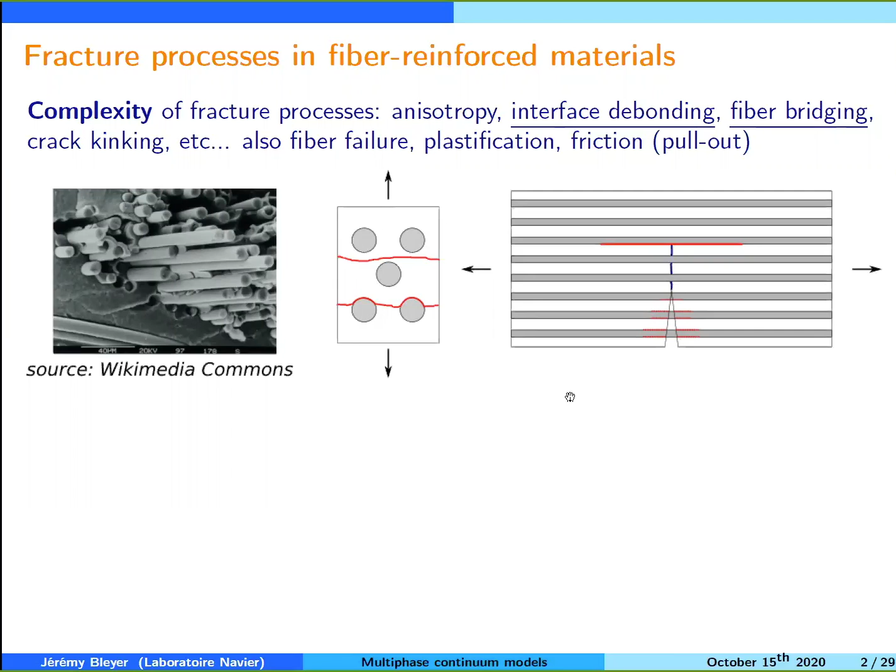This is the two phenomena I will be interested in this talk: interface debonding and the bridging effect of fibers in such a situation. More complex aspects like fiber failure and plastification or friction during pullout of the fiber, I will not investigate here.

It's quite interesting for us at Laboratoire Navier, because even if we are a civil engineering lab, we have some applications with ultra high performance fiber reinforced concrete, as you can see on the left, and also some reinforcement systems, for instance, in old masonry structures, mostly in Italy.

These are systems comprised of a grid of steel and some mortar on top, applied to the masonry structure which may have been damaged. When you study the strength properties of such a reinforcement system, you can see multi-cracking in the matrix phase because the fibers still remain intact inside, and this is the kind of thing we would want to address here.

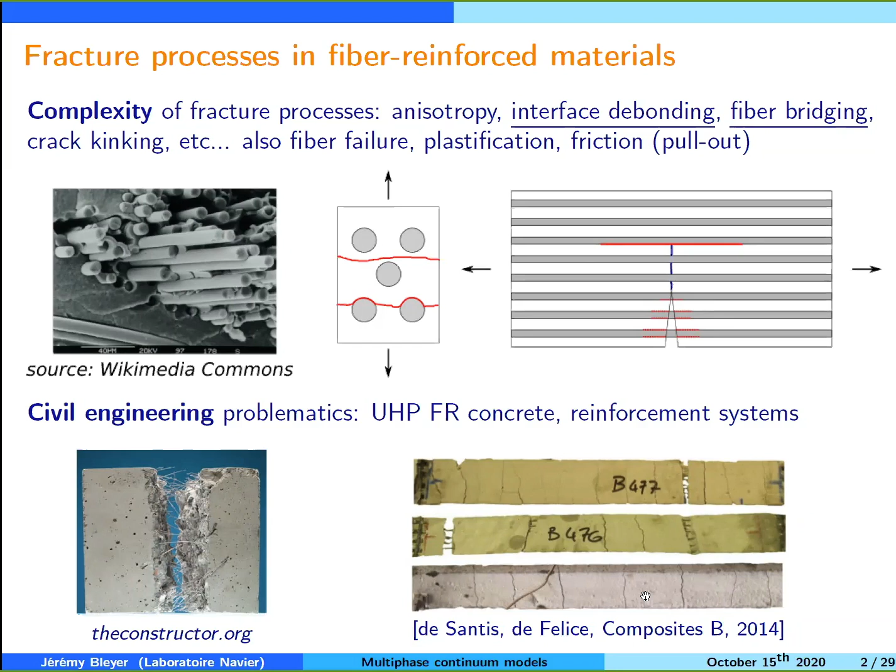As I mentioned, I'm interested in the crack bridging mechanism. You have intact fibers that still apply some forces on the crack, which is present only in the matrix phase, in competition with the fact that the crack will continue propagating in the matrix, and the fact that you can also debond the interface between the fiber and the matrix.

The competition between these two mechanisms is quite important, because it gives a toughening mechanism, which is quite interesting in biocomposites, for instance. As you will see, this will give some pseudo-ductile behavior due to the presence of multi-cracking and debonding.

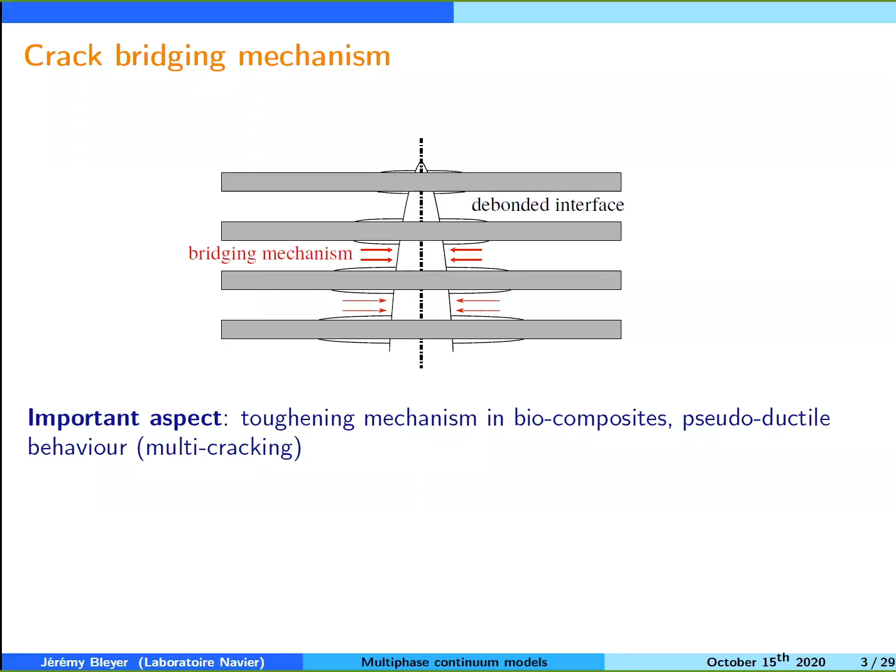So the question here is, how can we model this feature at the macroscopic scale? Because obviously we do not want to model explicitly all the fibers and the interfaces. One possibility is to use cohesive zone models, where you have some ad hoc traction separation law when modeling the crack, but this requires some fitting or specific identification.

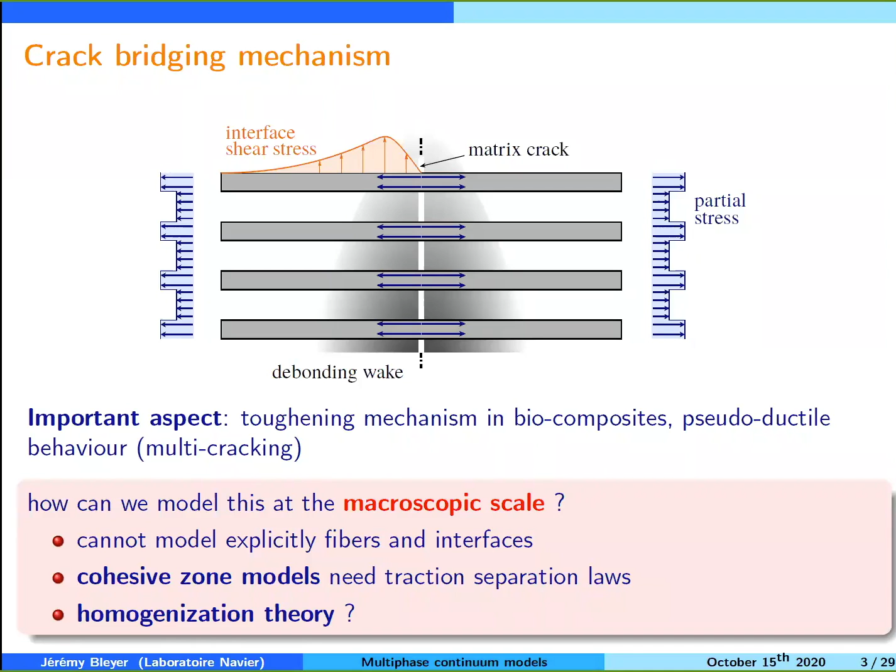The question here in this talk is, can we reproduce this kind of crack bridging mechanism using only a continuum theory that we could derive from homogenization, for instance?

The main issue here is that standard or classical homogenization has some issues, especially when you have a poor scale separation between the macroscopic scale of the structure and the scale of the heterogeneities, because you need a proper scale separation to apply standard techniques. It also doesn't treat well boundary layer effects, especially near free edges or around cracks, which is exactly what will happen here.

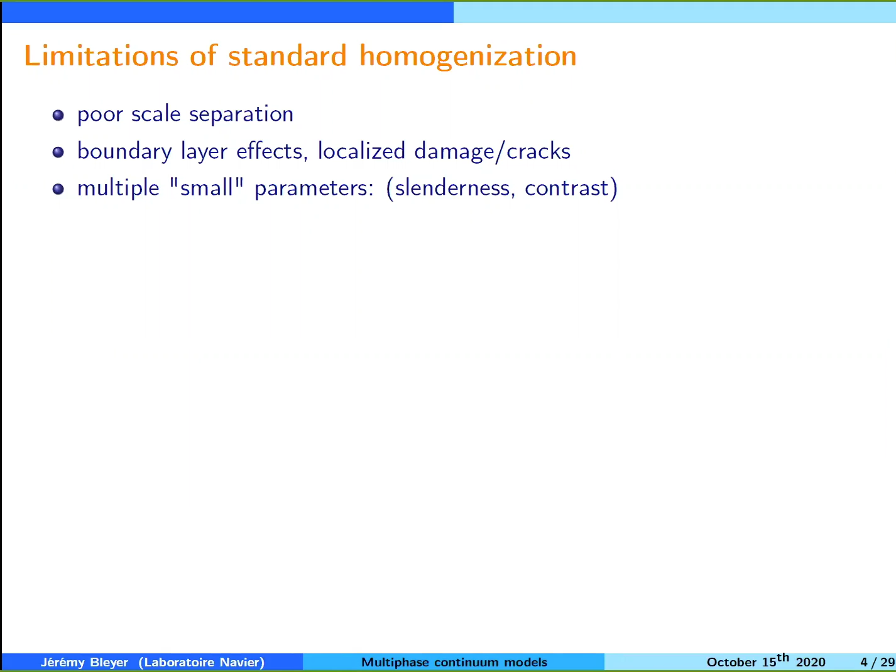And in some instances, it's also difficult to derive a proper homogenized behavior when you have multiple small parameters, like the scale separation parameter, but also the slenderness of the heterogeneities or the contrast of properties between heterogeneities.

All three of these situations can be quite frequent in fiber reinforced media. The idea here is to use generalized continuum models that may provide some answers to these limitations.

The standard Cauchy continuum cannot model the bridging region in an appropriate manner because, as you may have seen, in the matrix phase you have a crack-free surface, you have opening displacement on the matrix phase, whereas the fibers remain fixed. If you look at the symmetry plane, their displacement is fixed. So you cannot model in a single continuum which mixes both phases the fact that you have a crack-free surface in the matrix and a fixed displacement in the fiber.

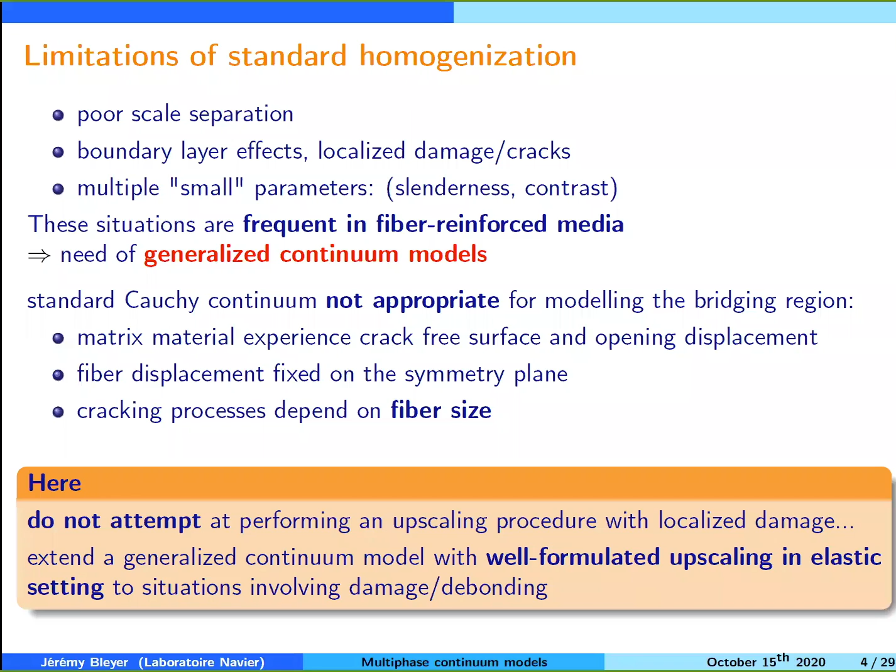Also, as everyone knows, the Cauchy continuum doesn't have any scale effect, so you cannot reproduce the fact that the cracking processes will strongly depend on the fiber size and give a size effect in such materials. So here we'll propose a generalized framework to account for all these aspects and investigate how we can model fracturing and debonding in such materials.

So here I will present the multiphase continuum model. The idea is that you replace the heterogeneous material by two homogeneous phases - let's say a matrix phase and a reinforcement phase. And both of these phases will have different kinematics, namely two different displacement vectors, which I call UM and UR.

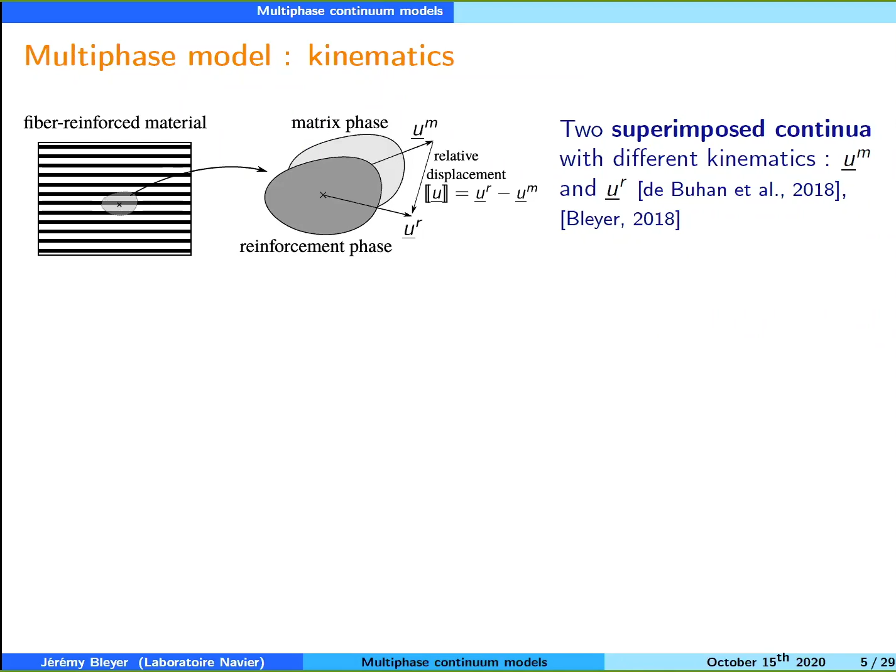And of importance is the relative displacement between the two phases. You have many ways to formulate such a theory. You can build them from the virtual work principle by just assuming that you will have a first gradient theory, that the work of deformation will involve the strain of both displacements and also the relative displacement between the two phases.

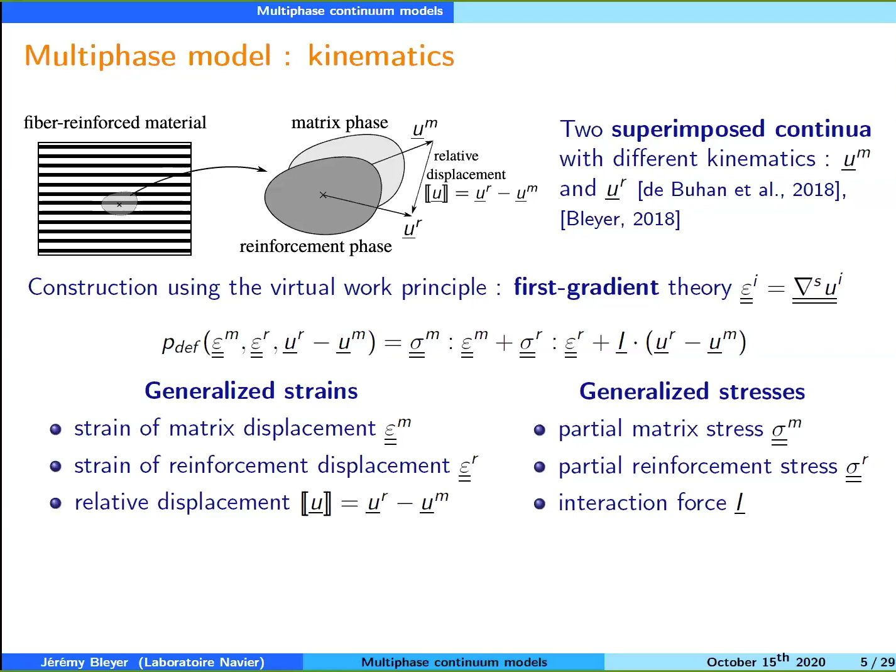When you assume this kind of expression for the deformation work density, you can identify, with respect to each strain measure, some generalized stress measures that will be associated. In terms of strains, we have the strain of the matrix displacement and the reinforcement displacement, and the relative displacement between the two phases. Associated with that, we will have a partial matrix stress, a partial reinforcement stress, and some additional stress, which we'll call an interaction force, which is a vector and which is related to the relative displacement.

And when we impose the fact that both phases have the same displacement, the same kinematics, then we recover the standard Cauchy medium, because we have only one strain measure, the relative displacement being 0. And in this case, we have the Cauchy stress, which will be the sum of the two partial stresses.

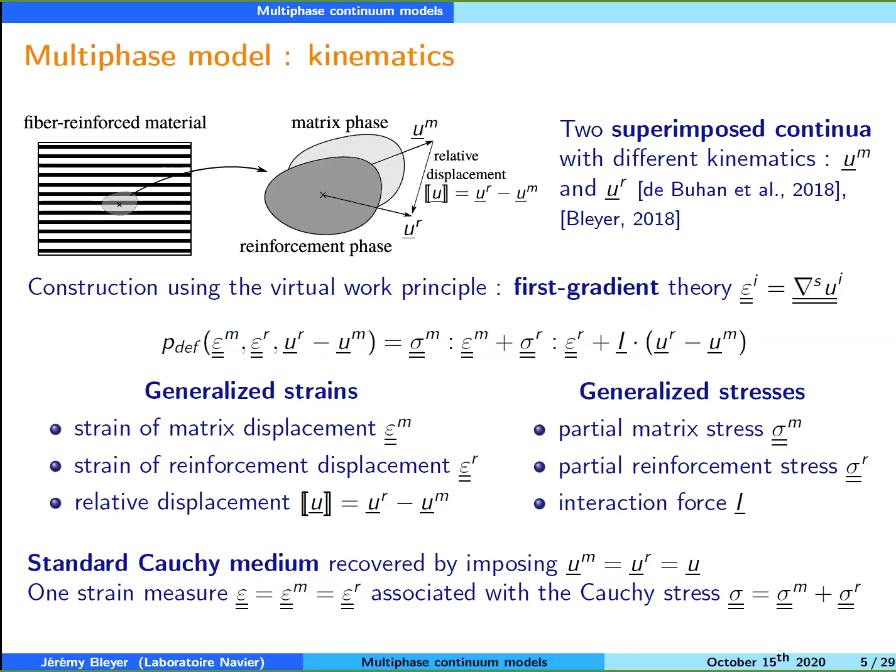So for people who know porous mechanics, this is exactly the same framework of having a matrix skeleton and a porous phase, except that in porous medium we have a solid and a fluid, but here basically we have two solids which share the same material point at the macroscopic level.

So if we use the virtual work principle, we can derive the balance equations at the macroscopic scale. You'll see that the divergence of the partial stresses are related to this interaction force and to some body force that can act on both phases. Again, if you sum these two equations, you recover the standard Cauchy continuum balance equation.

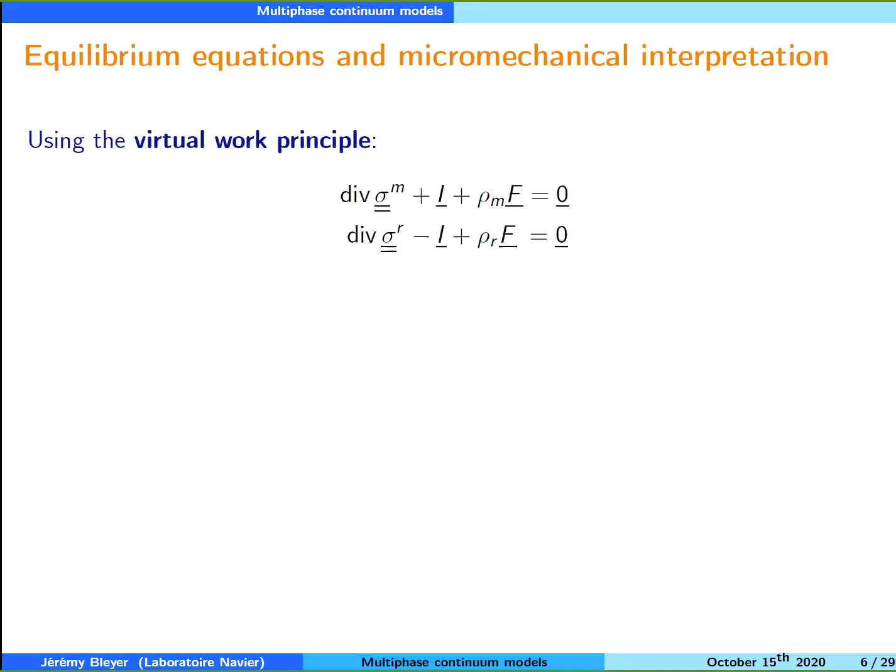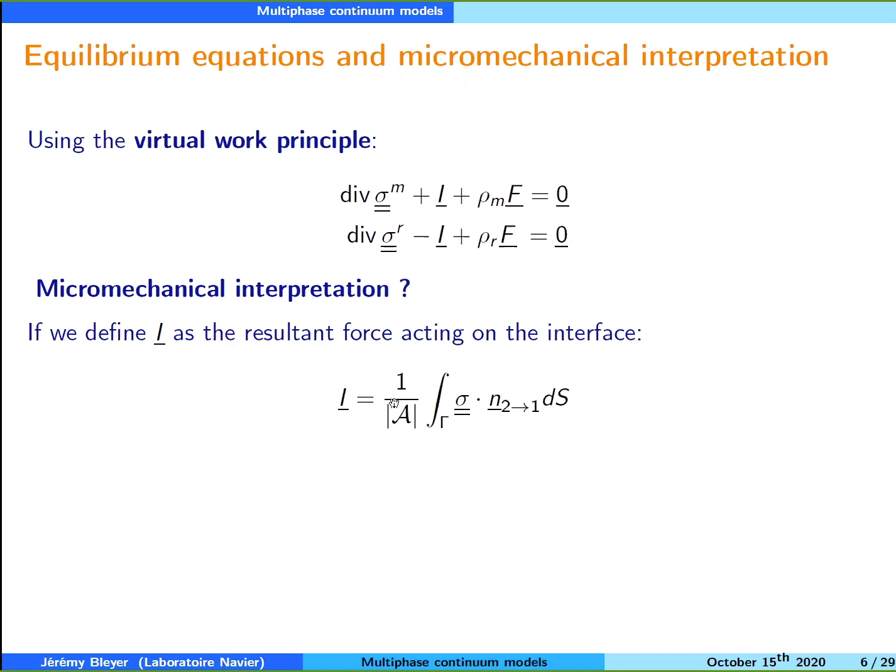So the main question here is, what is the micromechanical interpretation of these quantities? If we assume that we have a unit cell A of heterogeneous material and an interface gamma between the two phases, matrix and reinforcement, and if we define the resultant force I, the average resultant force over the interface as being the interaction force I, then we can show from the partial stress balance at the microscopic scale, we can derive the partial stress balance at the macroscopic scale.

Exactly like this, so following Coussy, for instance, where the partial stress - you can see it's exactly the same form as above - the partial stress is defined as the average of the stress over each phase. Which I will denote like that. So you have the volume fraction and the average over the phases AI.

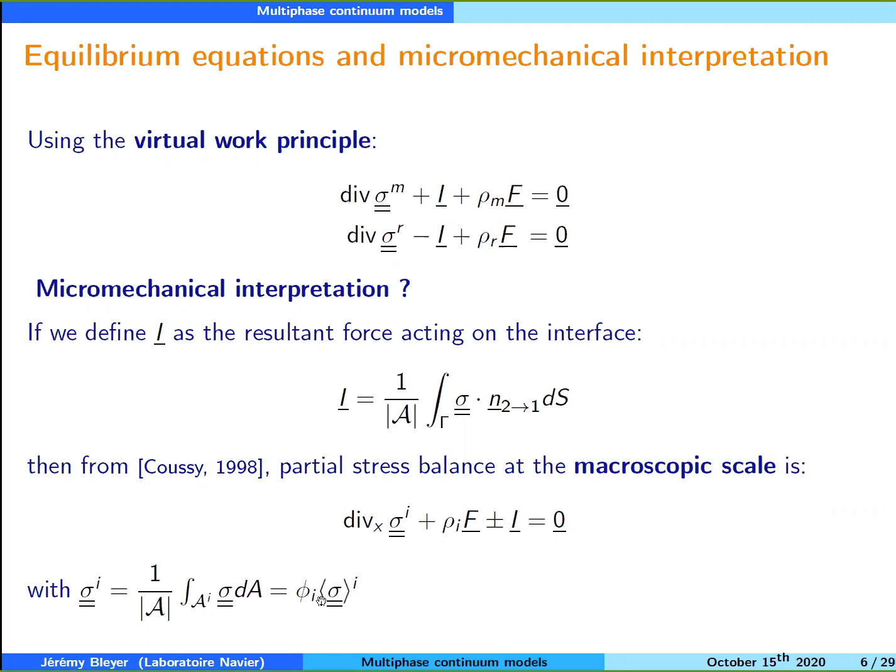So this gives us the main elements to derive an auxiliary problem, to go from the standard microscopic problem to derive the apparent properties of this generalized continuum model. Because the main issue when we work with generalized continua is how to compute the elastic modulus, and so on, generalized modulus that will appear when we assume an elastic behavior, for instance. So here I will do it in the elastic setting.

So here I consider a generalized auxiliary problem compared to what we usually do in standard homogenization. The main difference is that we are in a periodic setting where I apply some macroscopic strain on the boundary of the domain, and U will be a periodic fluctuation of the displacement field inside the domain.

The main difference is that I will additionally consider two eigenstrains in both phases, and two uniform body forces in both phases. So F here. That's quite different from standard homogenization. But in addition, I will assume that these eigenstrains and body forces are phase-wise uniform and are of zero average over the two phases.

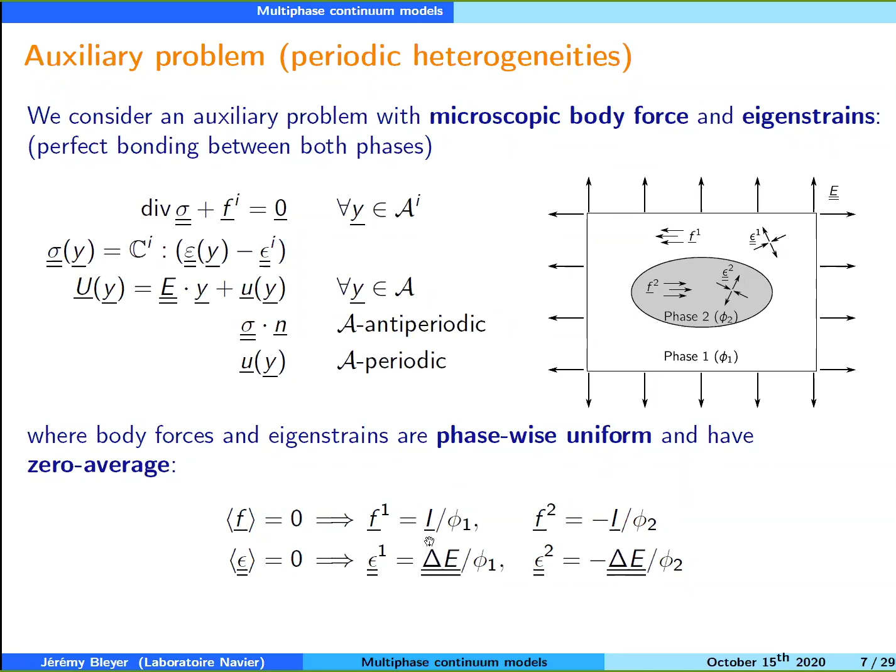So if F, for instance, is of zero average, then I can just replace it with a vector that I will call I, and divide by the two volume fractions of the phases, so that if I take the average of such F, it will be of zero average. And I can do the same for the eigenstrains by introducing some tensor that I call delta E.

If we do that, instead of piloting the problem with the macroscopic strain and this delta E, we can equivalently work with some EI, redefined with the relation between the EIs and the macroscopic E and delta E. When we do that, we have an auxiliary problem with three different and independent loading parameters: E1, E2, and I.

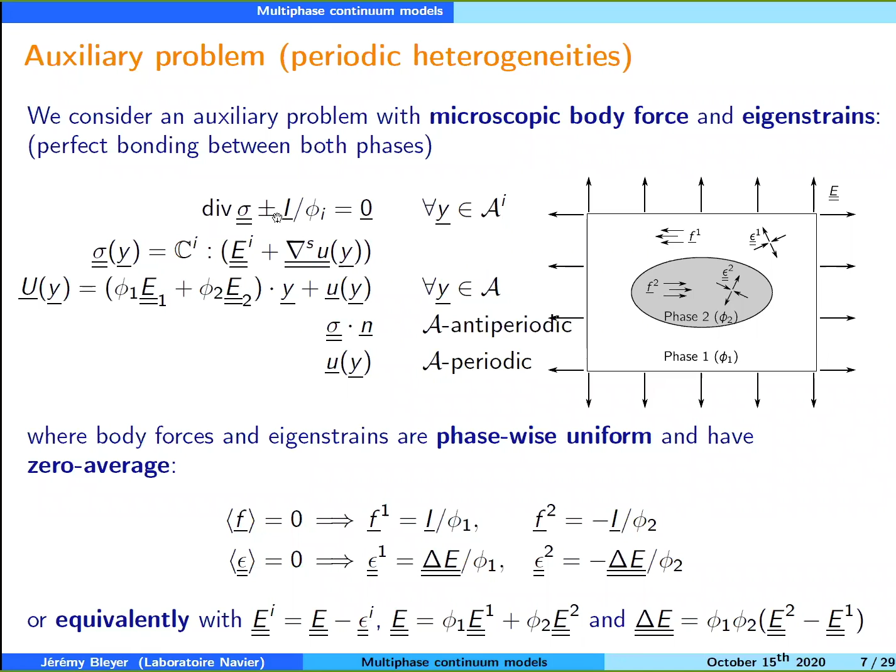And so I can solve this problem in an elastic setting. I can show, using an extended version of Hill-Mandel's lemma, that the dual quantities to these three loading parameters are exactly given by the microscopic interpretation I gave earlier of sigma I being the partial stress, the average stress on phase I, and the quantity associated with the interaction force.

It's something homogeneous to a displacement. I call it V, the relative average, the difference of the average displacement in both phases — U2 minus U1. So it's exactly what we would expect from the ideas that drive the construction of this model.

And when we have these three loading parameters in elasticity, we can write that the solution to the auxiliary problem depends linearly upon the three quantities. So we introduce some localization tensors, and we can compute the partial stresses and the macroscopic relative displacement V.

This will give us some apparent moduli, D11, D12, D22, etc. These, in bold here, are in fact third order tensors because they relate a second order tensor and a vector.

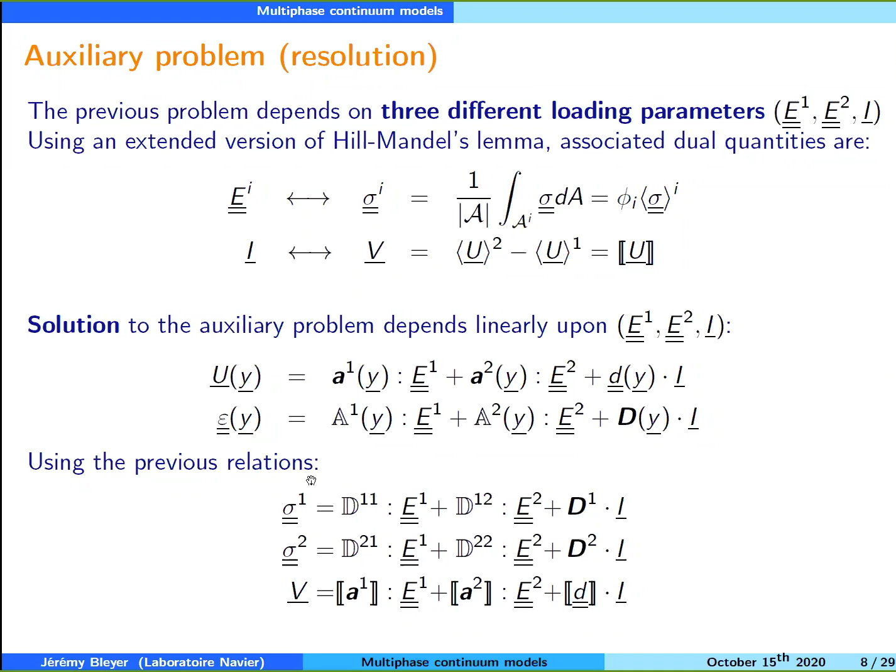Using the Maxwell-Betti reciprocity theorem, we can show that we have a symmetric behavior for this generalized behavior. And again, if we sum the two equations for the two partial stresses, assuming that we have the same strain in both phases and zero interaction force, then we can recover the standard Cauchy apparent modulus C-hom, which will be related to the moduli D11. So C-hom is D11 plus D12 plus D12 transpose plus D22.

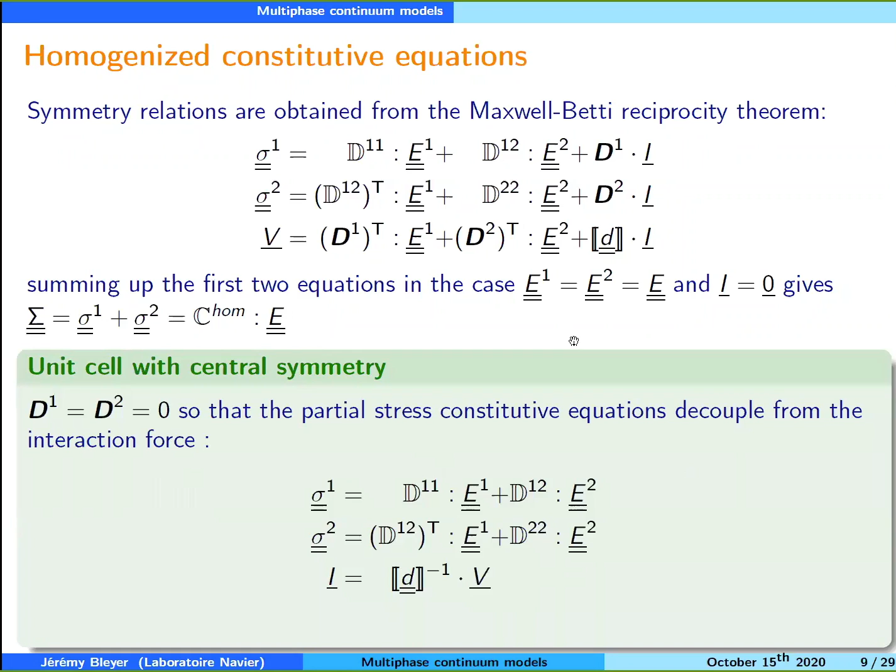And in the case where we have a central symmetry, the third order tensors vanish, so we have a much simpler relation in the end. In fact, we can go one step further when we have only two phases, two homogeneous phases — we can deduce the partial interaction tensors Dij from the standard macroscopic stiffness C-hom with these relations.

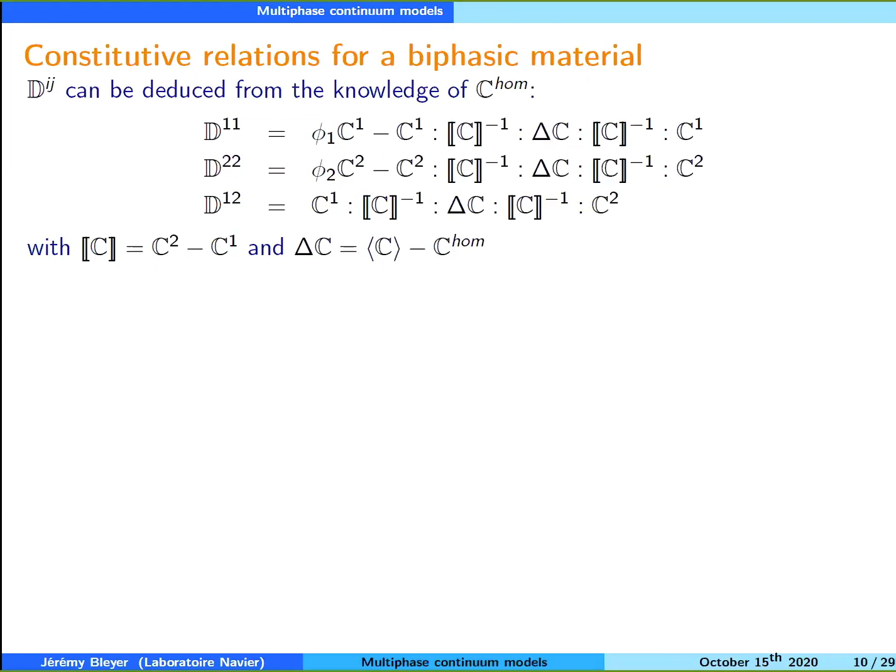And this gives us directly the value of these macroscopic tensors. Then we can investigate a quite important case in practice: when the inclusions are isotropic, very stiff compared to the matrix, and in small volume fraction, which is quite often the case.

With this kind of assumptions, and using results from Hashin and Rosen for cylindrical inclusions, we can show that the macroscopic stiffness — that's a standard homogenization result — is given by the stiffness of the matrix phase plus some uniaxial stiffness in direction one of the fibers, with a modulus E naught, which is the limit of the fraction of the fiber times the modulus of the material constituting the fibers.

So that's why we assume that this limit is not zero in small volume fraction, because otherwise we don't see the effect of the fibers.

And in this case, the above expressions simplify quite nicely because we don't have any coupling anymore between the two strains. The modulus of the matrix phase is, as expected, the stiffness of the matrix material, and the modulus of the reinforcement phase is only a uniaxial modulus in the direction of the fibers. So the fibers basically behave like an elastic bar aligned in direction one.

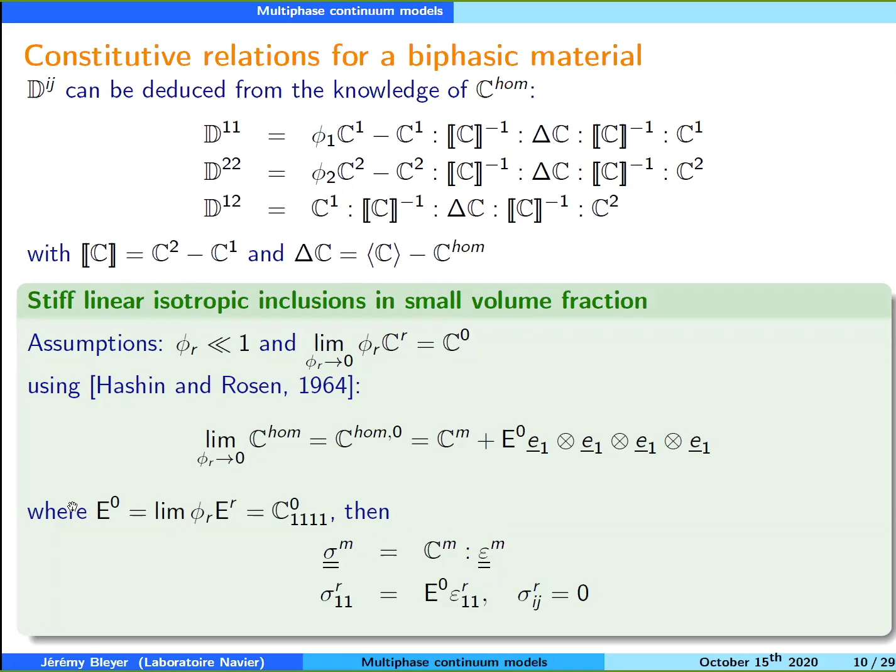So in this case, we can write the free energy density of this macroscopic continuum. We have three strains: a second order tensor, a scalar strain for the fibers, because we only have elongation in the direction of the fibers, and the relative displacement between the two phases. We have this decomposition of the free energy density with the contribution from the matrix, the contribution from the fibers, and an additional term related to the interaction between the two phases.

And this is what will be interesting here. This interface stiffness kappa is given by the solution of the auxiliary problem I presented before, when we have self-equilibrated body forces, so with no eigenstrains. This problem is quite similar to the homogenization of permeability in porous media. You can see quite easily that this modulus kappa will depend on the unit cell size S, so you will have a scale effect in this interface stiffness kappa.

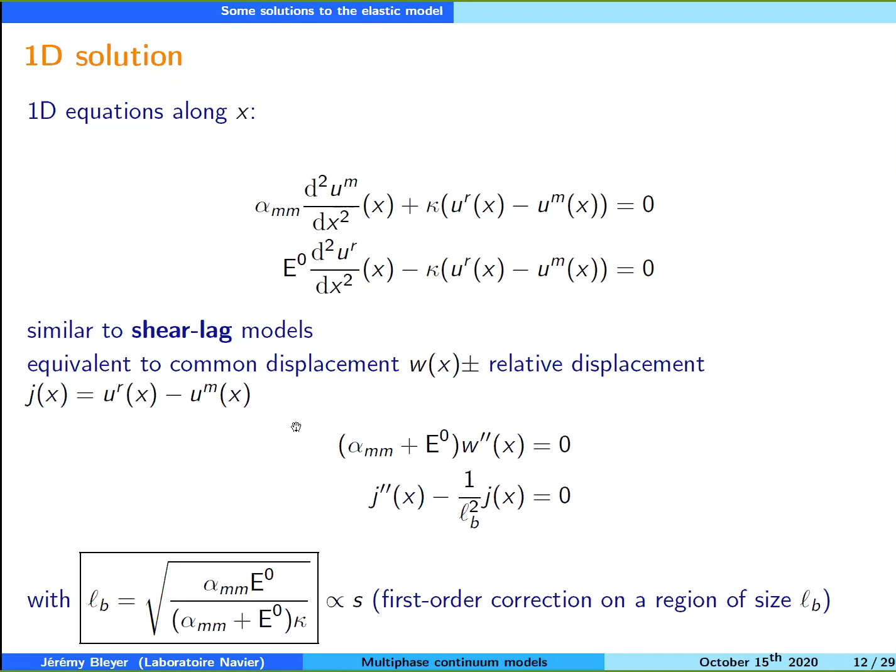So this multiphase model can be seen as a proper 3D generalization of shear lag models with strong micromechanical grounds, let's say. When you solve these equations, you can rearrange them by introducing a displacement W, which will be a common displacement of both phases, plus or minus a relative displacement of the two phases that I denote J here.

When you do that, you can recombine the equations and you have these two uncoupled equations. The first one is exactly the one you would get from the Cauchy continuum, so W would be the Cauchy displacement, and you can see the Cauchy stiffness that would arise in this setting.

And you have another equation, which is a Helmholtz type equation, because here it's only W with second derivative. Here you have J derived twice and J here.

This means you have a length scale that appears here, which I denote L underscore B, given by that expression. So you have a length scale which appears from the moduli of each phase and which also involves the interaction stiffness that I discussed before.

As I said, this interaction stiffness scales with 1 over S squared, so this length scale scales with S, and is typically of the order of S. S, I recall, is the spacing between fibers. So if you normalize it with the typical length of a macroscopic structure, you get the scale separation parameter.

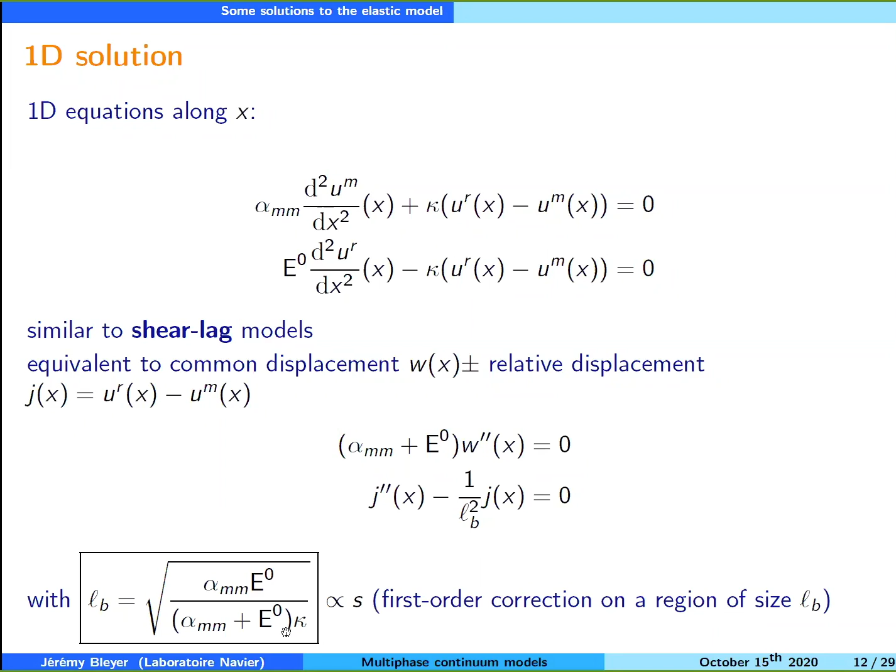So basically what we will see is that this relative displacement J will be a boundary layer, basically. Here you have what happens in the bulk of the material, and you have some boundary layer equation given by J, with a typical length scale given by the material parameters. So that's an example of what we can do.

In this setting, we can prescribe the displacement of both phases to be zero on the left. And on the right, what's interesting is that we can prescribe different types of boundary conditions for each phase, something which is not possible for the Cauchy continuum.

So we can prescribe, for instance, that the matrix phase is stress-free on the right, and that the displacement of the fiber is given by some quantity U. So basically here we are doing some pull-out tests of the matrix-fiber composite, by just applying a displacement only on the fiber. And when you solve the equations, that's the expression that you get.

And you can see that they involve this material length scale. When you look at the different stresses, the total stress is the sum of the two partial stresses, the matrix in orange and the fiber in green.

And you can see that when you are far from the region where you have these mixed boundary conditions, you recover the Cauchy regime, let's say, where everything is almost uniform, and you have these boundary layer corrections near the boundary with the typical length that scales with this material parameter.

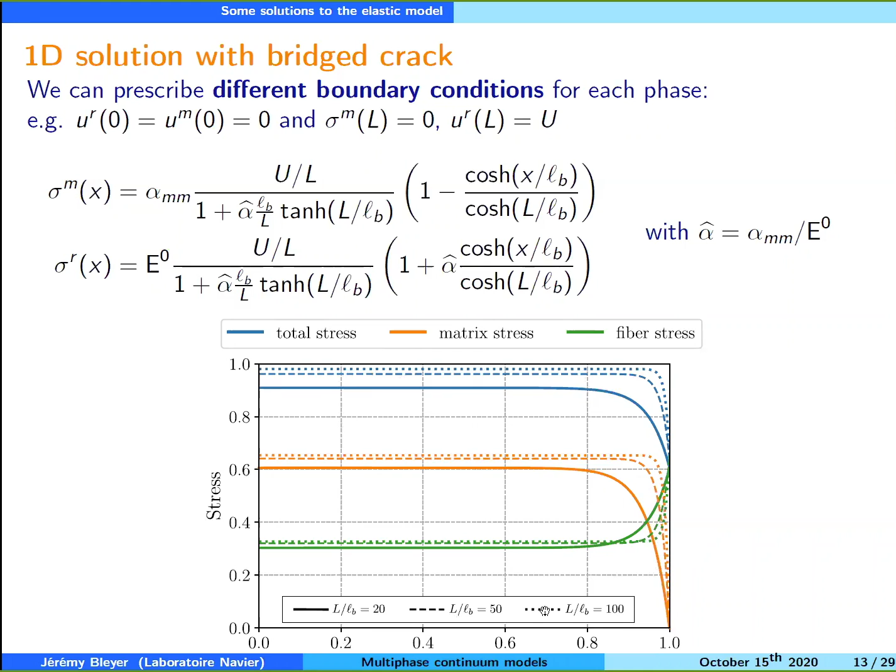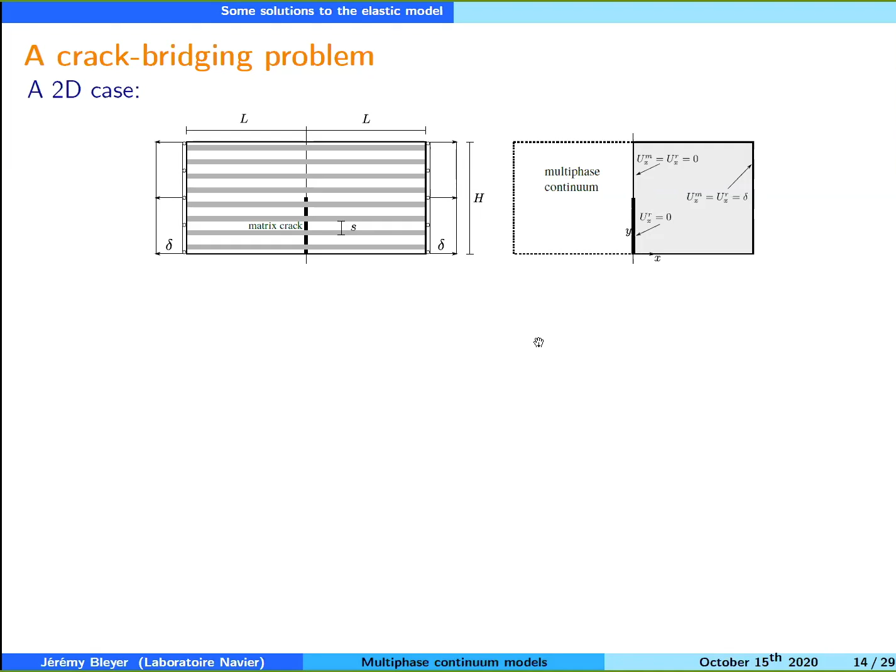And then we can look, so on the left, we can look at the matrix displacement opening. So in solid lines, across the height of the specimen, the crack is here. The solid lines are the results given by the multiphase model with a finite element implementation of this model.

And the symbols are the average of the matrix displacement when I average it over some region of the matrix phase around the crack. So you can see that it's exactly what you would get, and that you recover the scale effect, because the more fibers you put, the less the matrix will be able to open.

And in the limit where n goes to infinity, which would be what you would get from the Cauchy continuum, well, you cannot have any matrix displacement at this point, because you cannot fulfill the stress-free boundary condition and the fixed displacement boundary condition on this region. So that's why you have a boundary layer effect.

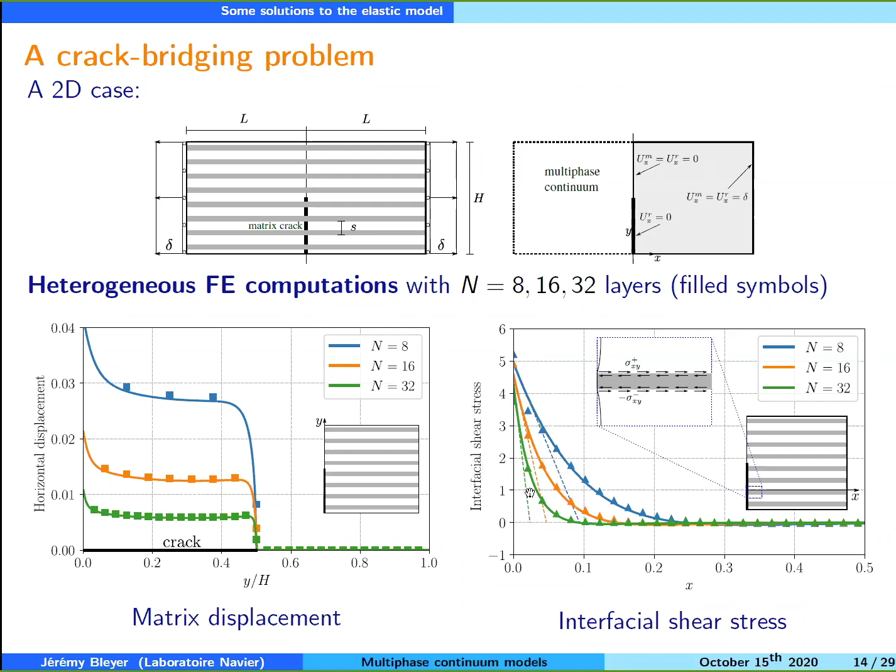And you can validate that also on the shear stress at the interface, because the interface force is related to the shear stress that happens at the interface. From this quantity, you can recover the value of the interfacial shear stress, which is 0 when you are far from the matrix crack along the interface, but as you approach, you have a strong concentration of shear stress near the crack. And again, you can reproduce this scale effect, this dependency on the number of fibers.

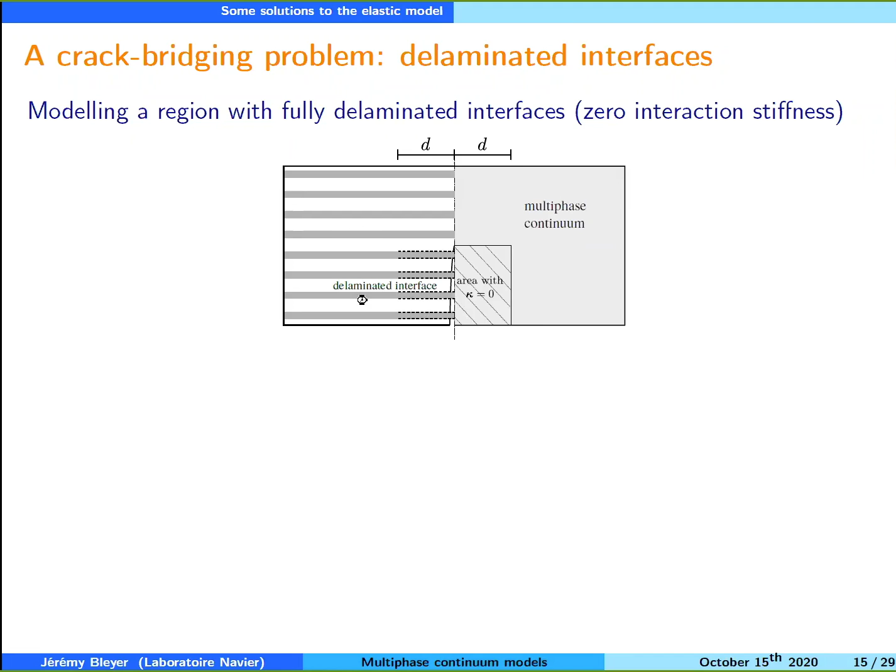And you can also model a delaminated interface, because you can just assume that you have no interaction stiffness in some region here, by imposing this stiffness parameter kappa to 0. And then this will model the situation where you have an interface that has delaminated between the fibers and the matrix. So this is again what has been validated.

So now I will show how we can use such models to model matrix cracking and the propagation of interface debonding, because in what I just presented, it was only elastic computations with fixed boundary conditions and fixed values of kappa in this region. So now we will formulate a coupled problem of matrix cracking and interface debonding.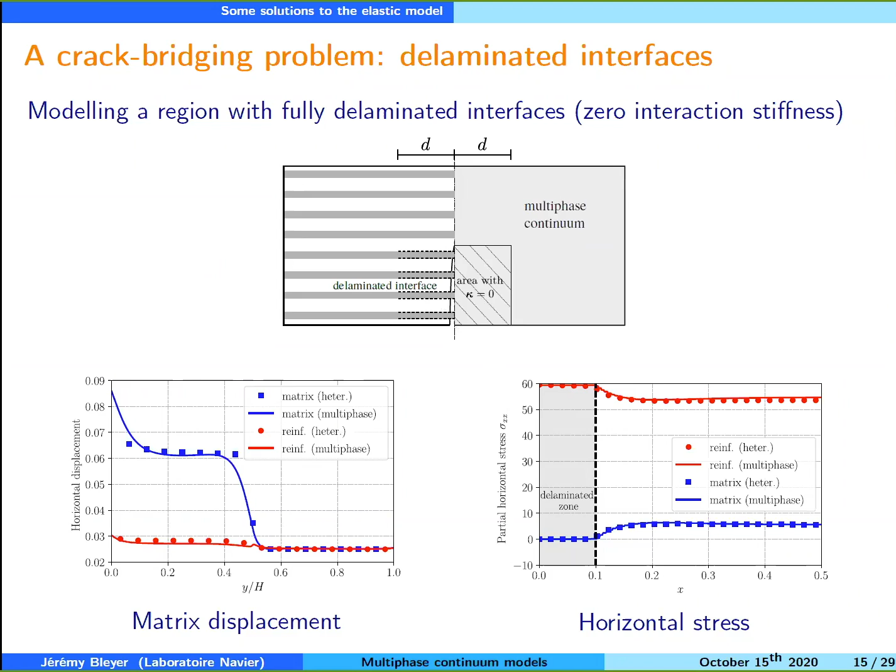So the idea here is to use the formulation of Francfort and Marigo from the variational formulation of fracture, but extended to this case. So here we assume that we have elastic fibers, but a brittle matrix phase and a brittle interface. In the matrix phase, I will denote by gamma the cracks only on the matrix phase, and by delta the debonded region between the two phases.

So we can formulate a total energy that consists of the elastic energy of the multiphase continuum, with the strain stiffness of both phases and the interaction stiffness of the interface. In addition, there are two fracture energies: one for the matrix, which is GC of the matrix times the length of the crack gamma, plus the interfacial debonding energy.

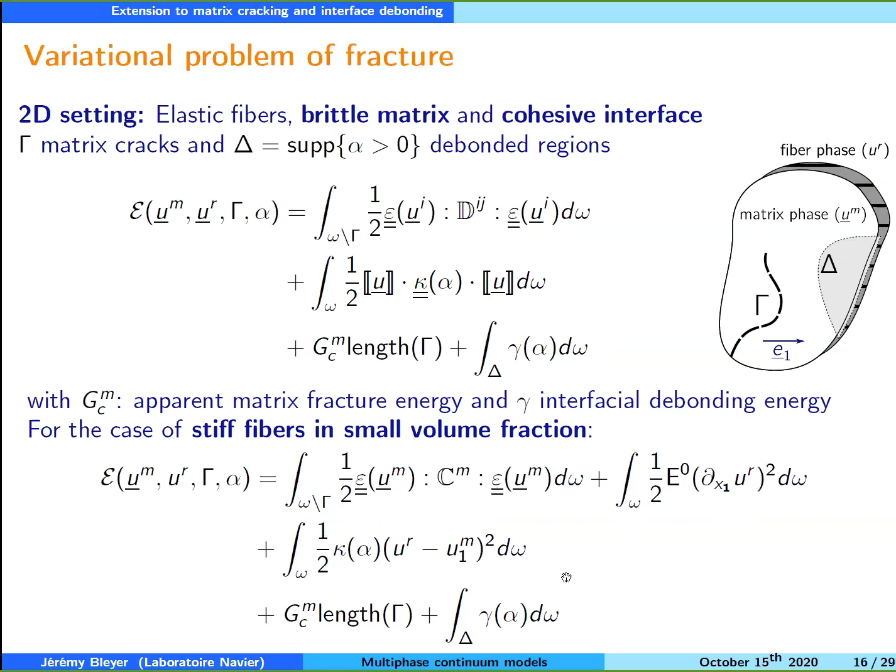So the problem here is that we have some cracks in the matrix phase, and to be able to simulate fracture processes in the matrix phase, we will need some kind of regularization. And so again, here we follow the important works of Bourdin, Francfort, Marigo, and so on, and all the works related to damage gradient models or phase field approaches to fracture.

So I will not go too much into the details. Some of you may know this kind of approach.

So here what we do is that we will have two damage parameters, let's say D and alpha. D will be the damage parameter related to the cracks in the matrix phase, and alpha, as I said, will be the damage parameter related to the debonding of the interface. And we will assume irreversible evolution of D and alpha. So to do that, we introduce a damage elastic energy of the matrix phase.

So we degrade the stiffness of the matrix phase by 1 minus D squared. We don't impact the stiffness of the fibers, so that's very important. It means we are not in a setting where we have a full crack. When the matrix has cracked, we still have some remaining stiffness due to the bridging effect of the fibers.

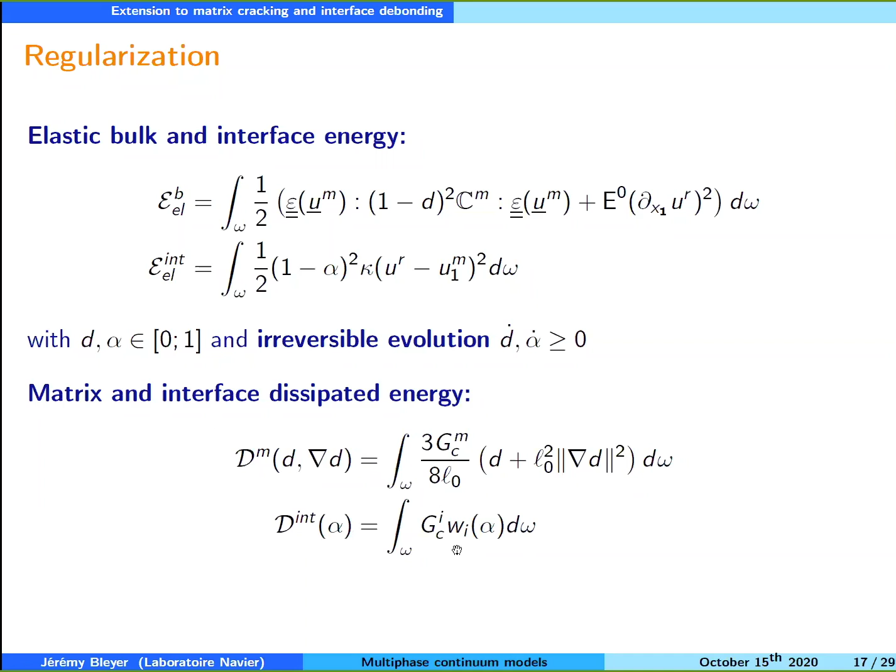That's quite a classical assumption here, and we'll also have some density for the interface dissipated energy, W of alpha, and for that we can consider different models. I will show them later.

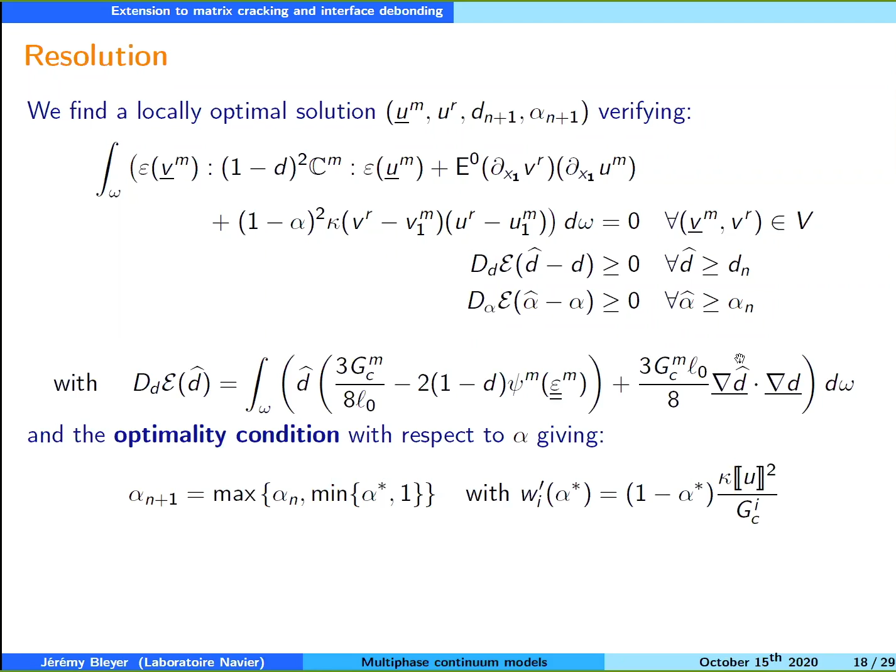So I will skip the resolution. It's quite standard. We have a variational inequality both for D and for alpha. For alpha, we have a local problem to solve, so it can be done in closed form for simple models. For the D parameter, we have a global variational inequality problem to solve due to the presence of the gradient of D. So that's quite standard.

As regards numerical resolution, we use a FEniCS implementation, and we do a three-field alternate minimization to compute local optima. So we compute the displacement problem, then optimize over D and over alpha, and do an iterative process to converge to a locally optimal solution for all the fields.

So that's the first application: a one-dimensional bar with an initial matrix crack in the center, under tensile loading. Here we are in a case with quite a strong interface, given by the ratio of the two fracture energies of the interface and the matrix. Since the interface is 200 times tougher than the matrix, it cannot damage at this strain level, and you can only observe multiple matrix cracking.

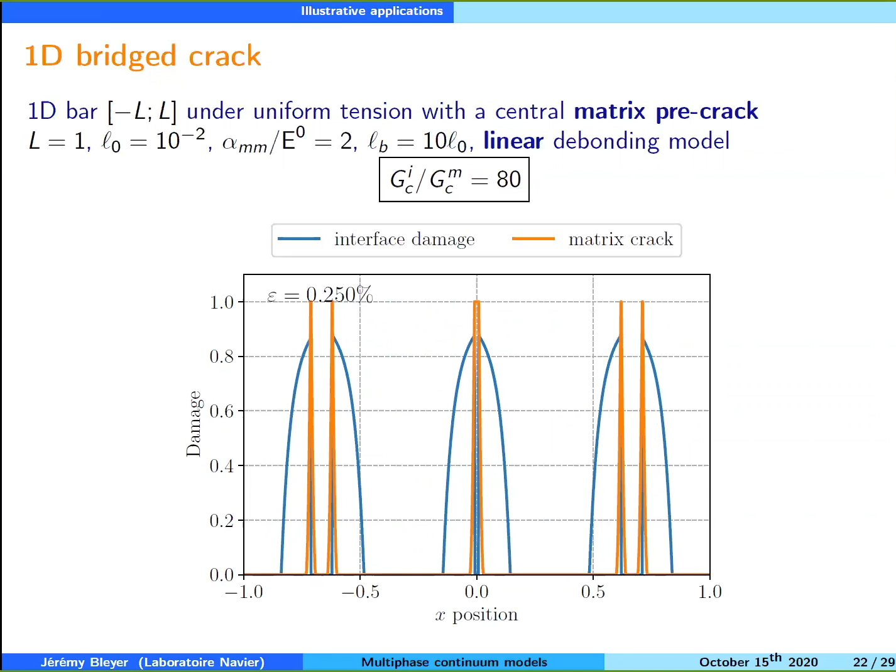And if you have some intermediate value for the ratios, you can have a competition between the propagation of debonding and the occurrence of matrix cracks.

So that's the load deformation behavior you would get for these three different settings. And you can see that you have some pseudo-ductile response. In blue, it's the apparent response of the composite. So you have initially an elastic phase, and then either elastic loading followed by matrix cracking and a succession of matrix cracking events in the case where the interface is strong, or a phase of interface debonding propagation.

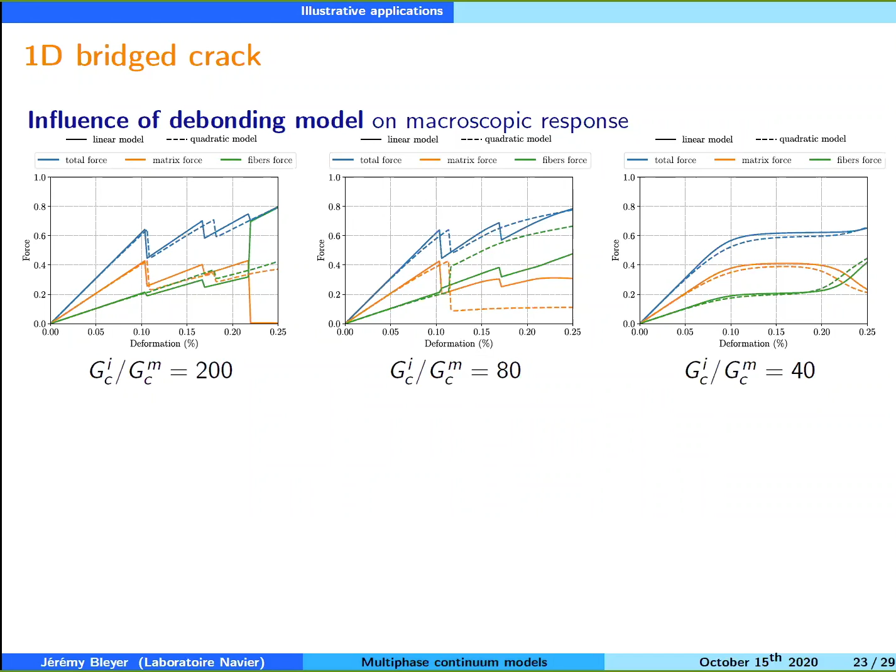But in both cases, you have this regime where the load is almost constant until you cannot damage anymore. And at the end, it's only the fibers that take all the rest of the loading capacity, up to the final failure of the fiber that we don't model here. So this quasi-ductile behavior, although we have only brittle materials, is quite important.

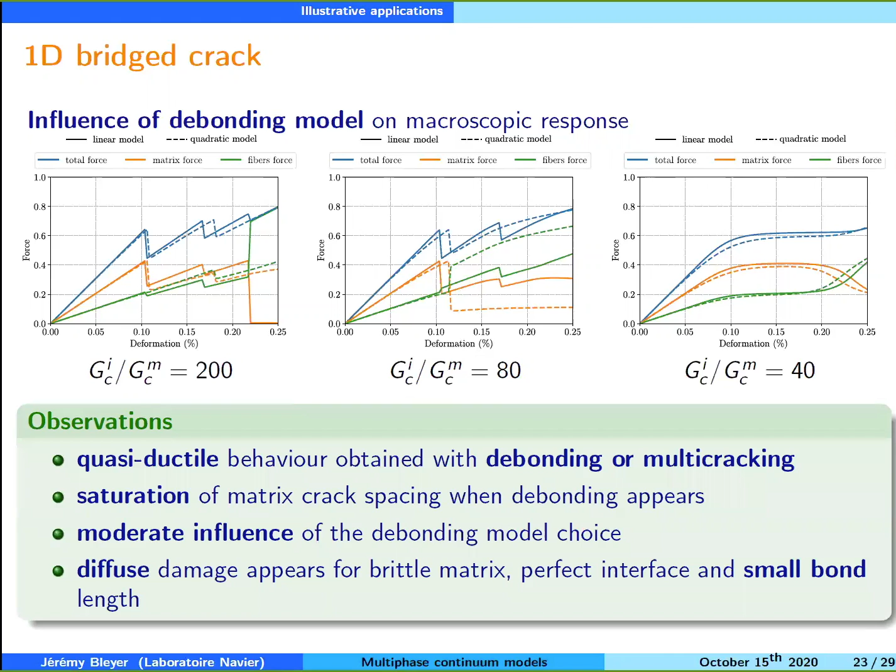So here we have some issue at some point where when the material length scale becomes comparable with the regularization length scale of the phase field approach, we get some kind of diffuse damage. But this is only a numerical artifact, because if we take a much smaller regularization length with still the same value for the material length scale, then we recover

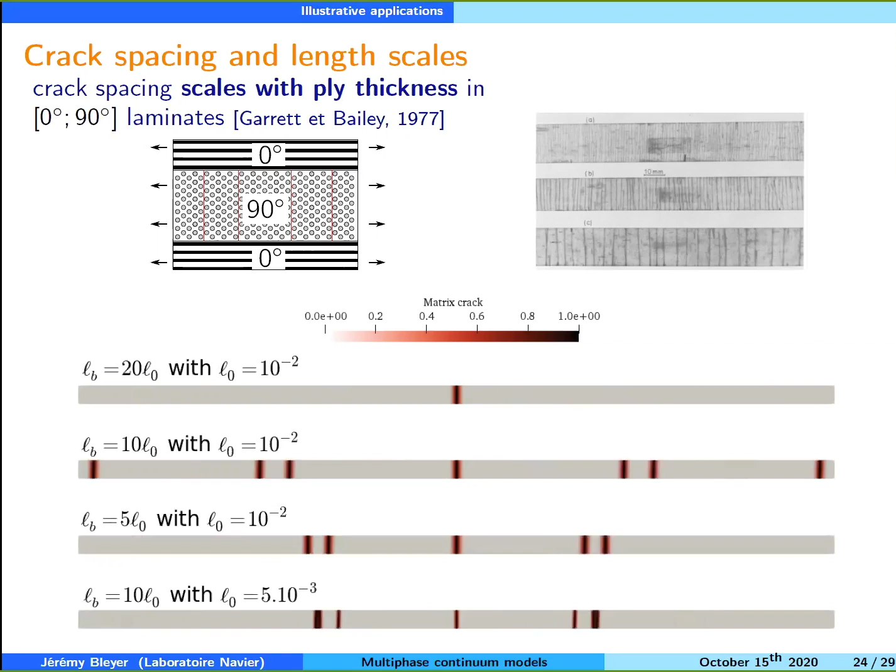multiple crackings with much closer spacing. Okay, and just to finish, this is an example where we have bending of a beam, again with a pre-crack, so you have the crack which propagates along the height, and at the same time the interface debonds,

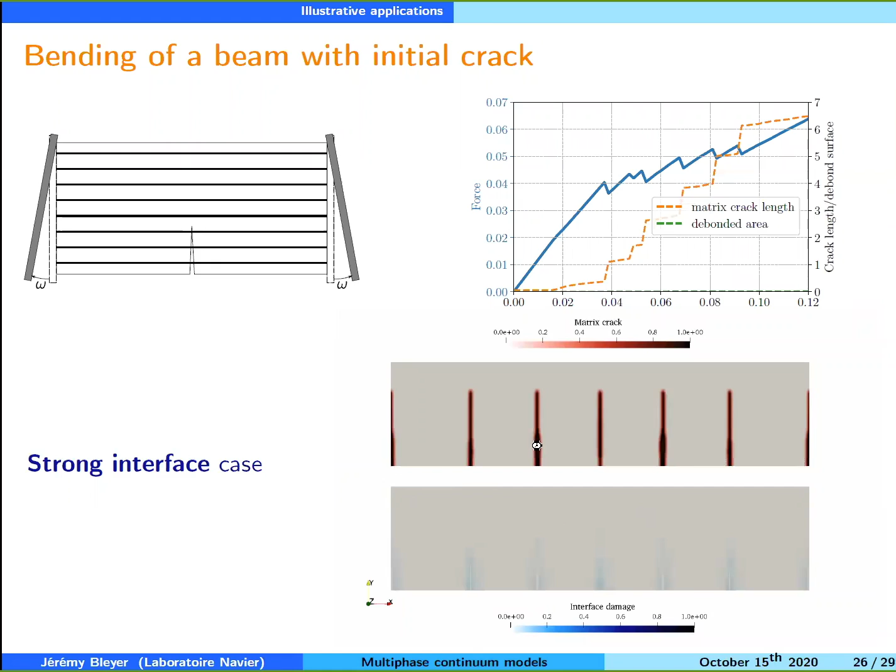because here we are in the case where the interface is quite weak, and again you have this pseudo-ductile response. And for the same setting, if you have a much stronger interface, then as you've seen, you will have multiple cracking of the beam along the span, and only very little interface damage.

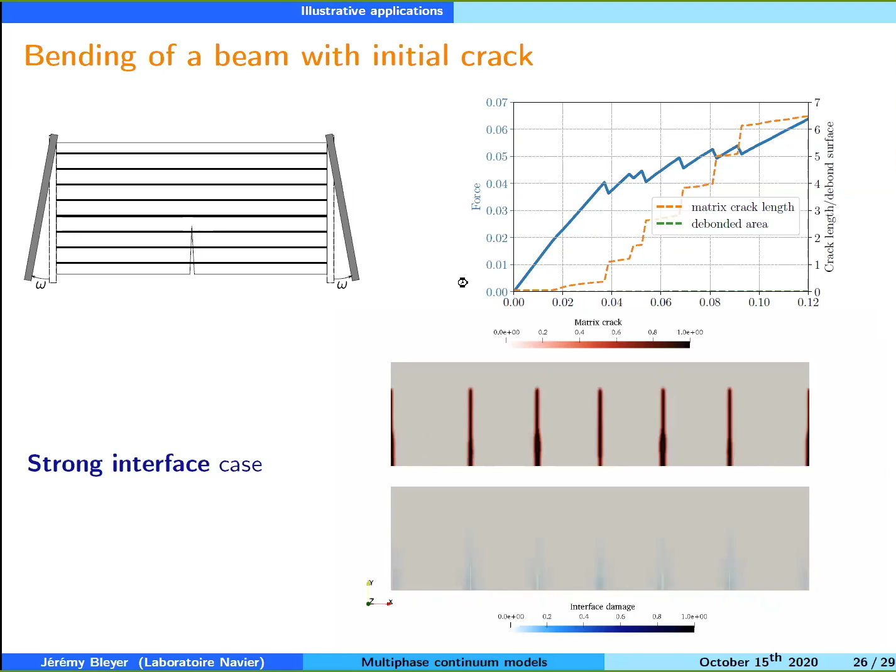So this is typically the behavior of ultra high performance fiber reinforced concrete, where the fibers are sufficiently strong to bridge the crack that occurs in the concrete phase, and this gives you a much higher strength and quasi-ductility even in tension for concrete material.

So I think I will finish here. I will skip the extensions. We can discuss that if you want.

So to conclude, these multiphase models can in fact be seen as generalized continua, which are well suited to fiber reinforced material, and which can be obtained at the leading order from classical asymptotic expansion, meaning that if you have an extremely soft matrix material, then the boundary layer basically will cover the full length of your sample.

In fact, it's not so often the case, and we can just see them as a correction of classical Cauchy continuum to account for what happens near the boundaries of such fiber reinforced material.

And this is very important for accounting for all these matrix cracking processes, because this basically creates some new stress-free boundaries, and the boundary layer effects happen in the interesting region where damage takes place.

So what's quite useful is that we can have a proper homogenization procedure to identify the generalized constitutive parameters, because that's often something lacking when you have other generalized continua like second gradient or micromorphic approaches, where the new constitutive parameters cannot be easily computed from microscopic properties.